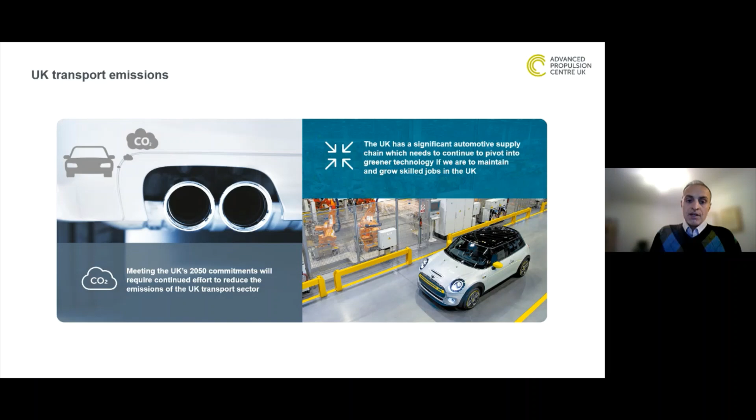In the UK, we specifically support later stage R&D and commercialization through our CR&D program, that's our Collaborative Research Development Program, and the Automotive Transformation Fund, which is the key engine to develop upstream supply chain for the future of the automotive sector, specifically for batteries, power electronics, materials.

We also have some bespoke funding programs like for SMEs and for other development processes like demonstrators.

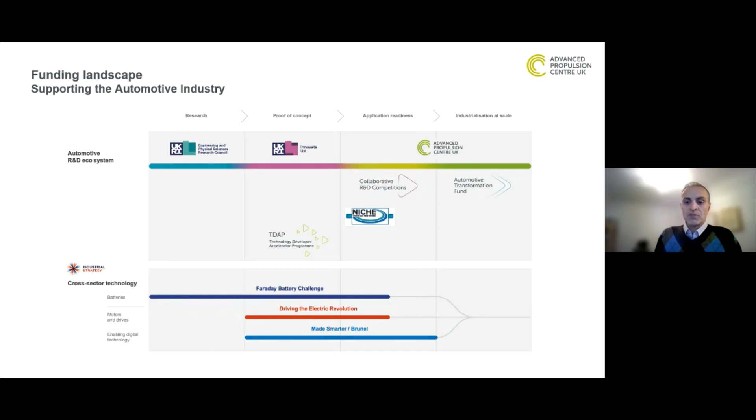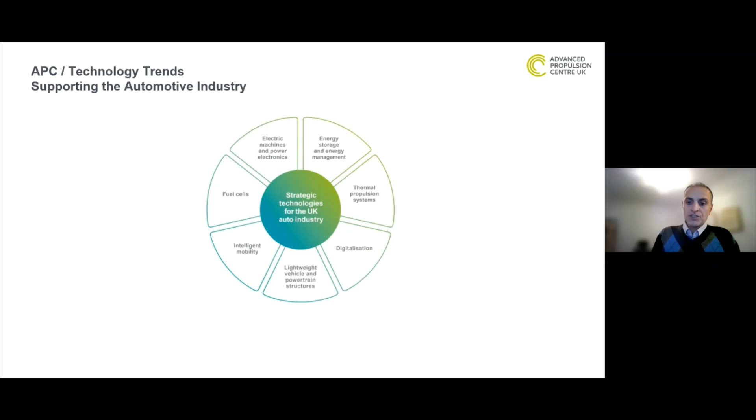We also provide strategic inputs and strategic insights, now a quarterly demand report. You've probably seen some of them over the past 3-4 quarters.

This is to inform the decision-making process and investment plan across these strategic technologies. We also undertake and provide bespoke analysis on key technologies and mobility trends, and all of these feed into our major funding programs, CR&D and ATF I mentioned earlier, also supporting national and international events and conferences like this one today.

Now let's take a look at the HDV sector, and my argument here is mainly applicable to HGVs, heavy good vehicles. I have not included off-highway heavy duty vehicles into this presentation.

We are working on that segment too, working on the TCO model and likely powertrain solutions across the whole HDV sector. Planning to publish an insight paper on HDV decarbonisation, hopefully Q1 next year, to include both off-road and on-road heavy-duty vehicles. But for now, the main assumption here is on-road HGVs.

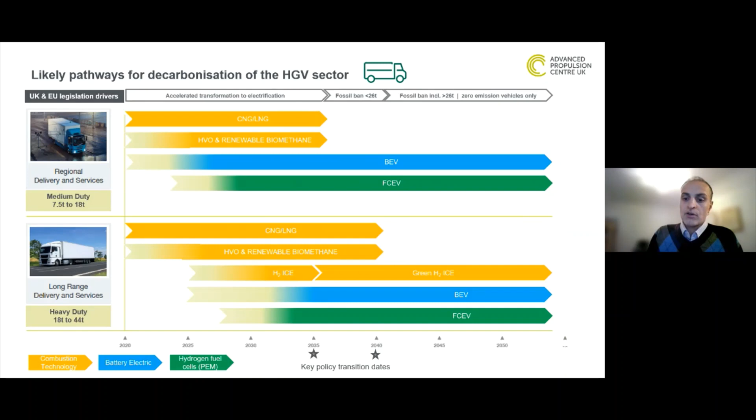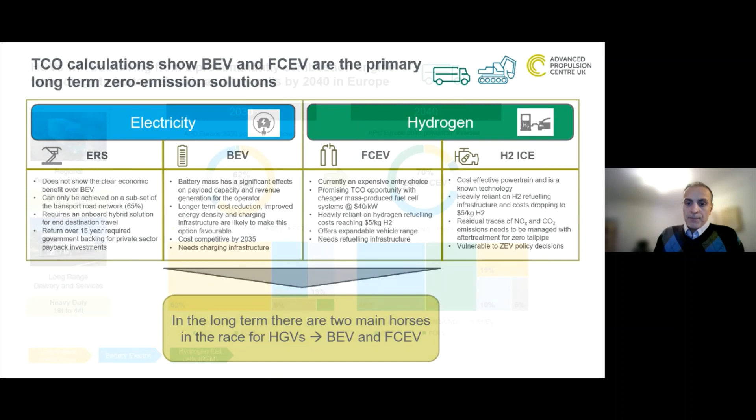So I believe 2 main horses in the race to zero emission HDV sector will be electrification and fuel cell. This means moving from today's profile of more than 90% of the fleet being internal combustion based on fossil fuels, to around 62% diesel in 2030, and then a major shift we will see from 2030 to 2040, getting to more than 70% of HDVs being on BEV and fuel cell technologies.

And in that mix, you can see battery electric will be dominant at around 40%.

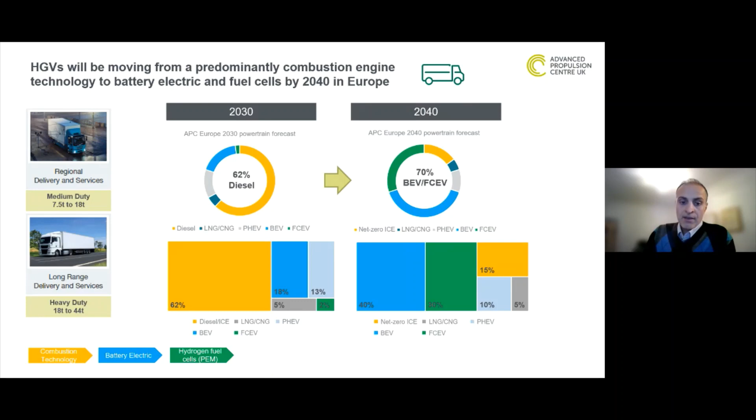So having that in mind, now let's take a look at one of our recent publications, our latest quarterly demand report. It's the latest one until next week, or maybe the first week of January, when we publish our next quarterly demand report for Q3.

This one is published in September, and you can download it for free from our website. I have to add that in previous quarterly demand reports, this one and the next one we're going to publish, either next week or the first week of January, we did not do a specific analysis for the HDV sector demand yet.

We are currently doing a supply chain mapping and intend to publish an insights report based on that, and then provide detailed analysis of the battery demand, including alternative chemistry and some of the discussions you've had today from the previous 2 sessions. So just have that at the back of your mind while I'm talking over the next few slides.

So this is an overview of what our quarterly demand report covers from global, European and UK perspective. Our forecasts are based on vehicle production geography rather than sales. And we look at LDVs, light duty vehicles, and HGV vehicle segments in our quarterly demand report. So we analyze the materials requirements, also forecast electric motor demand and materials requirements for that too.

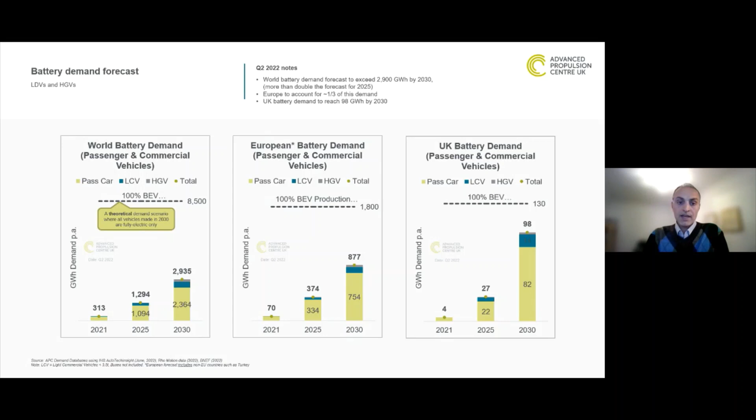So the next two slides, this one and the next one, are focused on the LDV segment. As I said, we didn't do a tailored HDV analysis last round, and even this round, we are not going to provide detailed data for the HDV segment. As I mentioned, we are working on an insight paper on supply chain opportunities, and we'll provide detailed data and figures for the HDVs. However, I think looking at the battery demand from an LDV perspective will give us a good overview for the supply chain opportunities across the entire supply chain.

And I'm going to mention some of the cross-cutting themes and challenges and opportunities for the whole sector for all vehicle segments. So bear with me until I get to those summary points. So battery demand for the LDV segment, passenger cars and vans under 3.5 tons, accounts for more than 85% of the total automotive sector demand. And as we expected, BEV production takes the lion's share of demand out to 2030. Globally, we expect BEV production to account for around 40% of all cars and van production by 2030. And in Europe and the UK, we see this figure being above 60% in the same period.

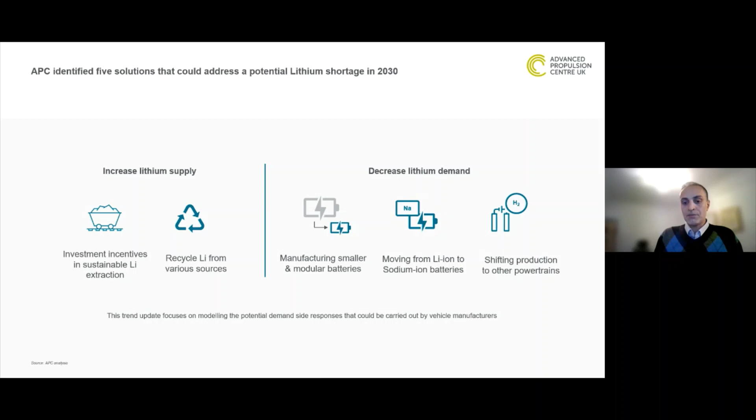While there has been a lot of talk about the investments required in extraction and refining of battery-grade lithium, in our latest report, we focused on understanding the potential demand side from OEMs, and it's LDV OEMs I'm talking about here. So those scenarios on the right-hand side, decreasing lithium demand, is mostly applicable to LDVs. But I think on the next slide, I'm going to show you some of the impact that the HDV OEMs' requirements and strategies could make to address them as well.

So just going back to those pathways to reduce exposure to lithium shortage, based on our analysis, the impact of investment in lithium extraction, sustainable lithium extraction, and basically investing in the upstream supply chain for lithium could be relatively high by 2030 compared to recycling lithium from BEVs, for example.

We think significant supply from BEV end-of-life retirement and battery recycling will likely come after 2030, maybe around 2040. But investment and innovation in recycling should happen by the end of this decade, and we have to think about it upfront to enable recycling towards the middle of the next decade, towards 2040.

In terms of decreasing lithium demand, moving to a smaller battery pack could have a relatively high impact, mainly applicable to the LDV segment, and it would call for more investment in charging infrastructure, which could be a helpful step forward for the electrification of HDVs too.

Looking at alternative chemistry, we said it could have a lower impact, again mainly because it's still at R&D stage. Moving towards higher TRL and MRL levels would probably take slightly longer, happening after 2030 to have a bigger impact. The other scenario for both LDVs and HDVs is combining and using alternative net zero powertrain technologies, like using fuel cell technologies alongside battery electric technologies.

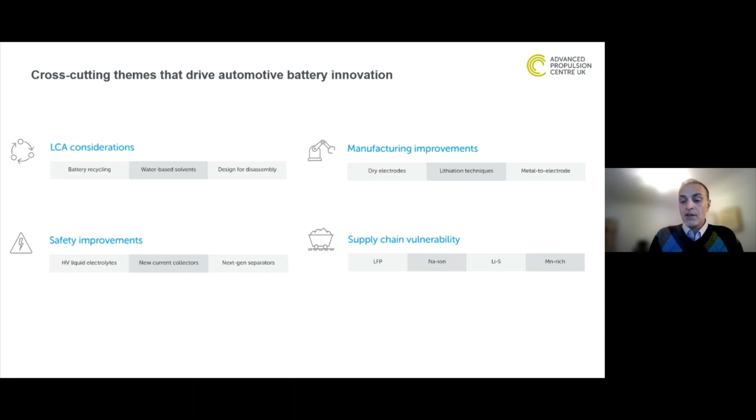So, in summary, I think the global battery demand growth for this decade will reach over 2,900 gigawatt hours by 2030 for the automotive sector. This will, of course, put pressure on global lithium supply, which needs to grow exponentially by 8 times compared to the current level.

And we need to invest more in battery innovation for different applications. Invest in alternative net zero powertrain technologies, alongside BEVs, to reduce reliance on one material, to reduce reliance on lithium markets.

Also, EV batteries will be subject to cross-cutting challenges, which calls for R&D and innovation across these four themes: safety, manufacturing improvements, recyclability and implementation of a circular economy business model, and of course supply chain development, especially on the upstream side of the battery manufacturing and battery supply chain. That's where we need to establish links with likes of CBMM to ensure security of supply for the future of UK battery demand.

So UK opportunities in this sector: developing upstream supply chain, attracting anode and cathode manufacturers to build an ecosystem for battery production here in the UK.

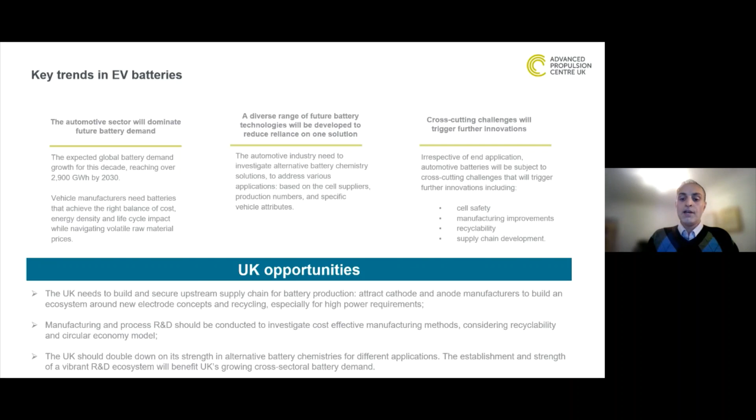I think we had the news a few weeks ago - we have confirmation of the second round of funding for the Faraday Battery Challenge, which will leverage R&D to address some of these battery innovation requirements. But obviously, we need continuous investment, private and public, to secure the future of the UK automotive sector.

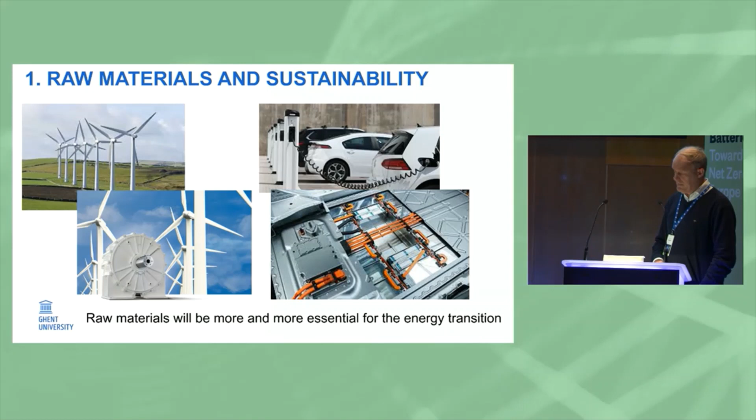The need is huge. If you look at international reports, for instance from the OECD in their outlook to 2060, they expect a quadrupling of demand for metals. And if you look at European Commission studies towards 2050 for nickel and cobalt, they expect a 3-fold or even a 10-fold growth in demand. That's huge, so circular economy and recycling will not be able to supply the demand. We will need further virgin resources, I may say.

These materials are essential to address climate change, so they should mitigate climate effects. But of course, these huge amounts of materials - we may wonder if this will also come with a certain footprint, or a new footprint, or another footprint. So are we really facing a sustainable transition if we have these huge amounts in front of us that we have to mine, refine, process, manufacture, and so forth? So we need a kind of sustainability assessment, I would say.

This is very important because there are already potential threats in scope. We know that mining, like agriculture, is a land-based activity that brings threats for biodiversity, for the ecosystem. And we know that we also need ecosystems, because ecosystems provide us with ecosystem services - provisioning of food, regulating services, even cultural services. So pretty important.

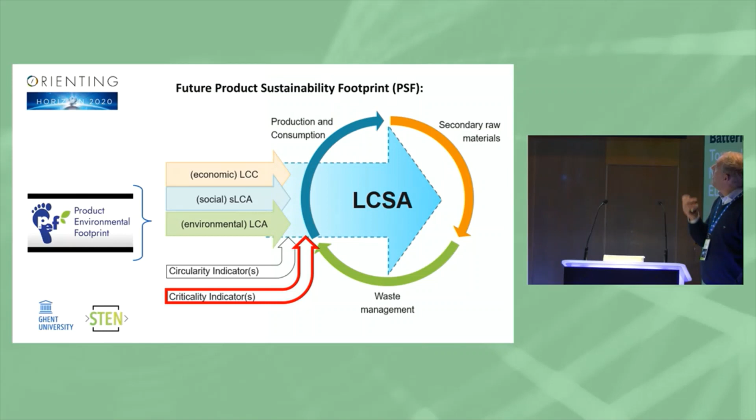Just for information, in the European Union we are also working on expanding the product environmental footprint. The European Commission, in the long term, likes to move from product environmental footprint to product sustainability footprint - expanding from the environmental pillar to also incorporate social and economic issues, plus circularity and criticality, making up the full picture of product sustainability footprint. That's an ongoing project with multiple partners, including industry.

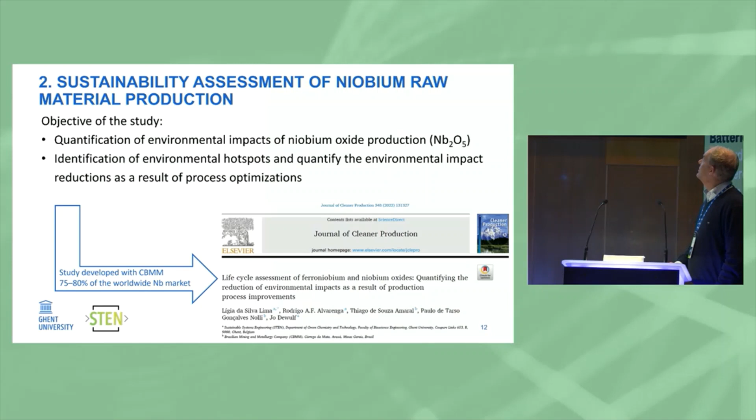That brings me to my second section, looking into niobium. We had a recent study together with CBMM, which is quite important if we want to address environmental sustainability of niobium raw materials. We looked into niobium oxide production to identify environmental hotspots and to see room for improvement, options to improve the production. This year the paper was published with Lígia as the main author. I'll explain a little bit of the outcomes here - if you're interested in further details, you're welcome to look into the paper.

Essentially, what we did is a cradle-to-gate study. We looked at the niobium oxide leaving the plant in Araxá, Brazil, and related all impacts to 1 kilogram of niobium oxide. Here and there we needed to do some allocation - these are things you need in an LCA. We were lucky to have really representative primary data from the company. And of course, for the background supply of chemicals and so on, we needed to rely on market supply - databases like ecoinvent, which we used.

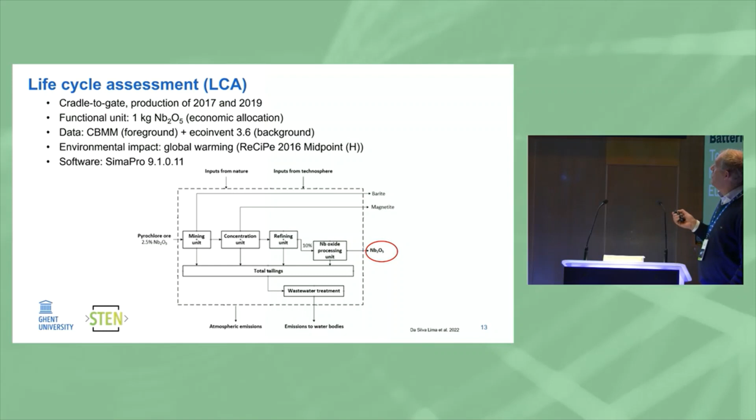We looked into different environmental impacts. In this presentation, I'll focus on global warming, and of course you need software to run that. Here you have a scheme with the main processes included in the system boundaries: mining, concentrating, refining, the oxide processing, and also attention to the further downstream processing of residuals - tailings, wastewater treatment, and so forth. You have inputs taken from nature, but also from the market, like chemicals for processing, and you end up with emissions alongside your main product and co-products.

Of course, your ore body - remarkably, the amounts needed in 2019 were higher than in 2017, so the ore grade was different. That's not really favorable in terms of decreasing the footprint over time. However, there were a couple of other factors that were favorable.

For instance, the use of renewable energy was increased from 2017 to 2019, and non-renewable based electricity was even phased out in between. Also, with respect to fuel consumption, we saw a lower ore grade used, and even there we saw a reduction in consumption because of process modifications.

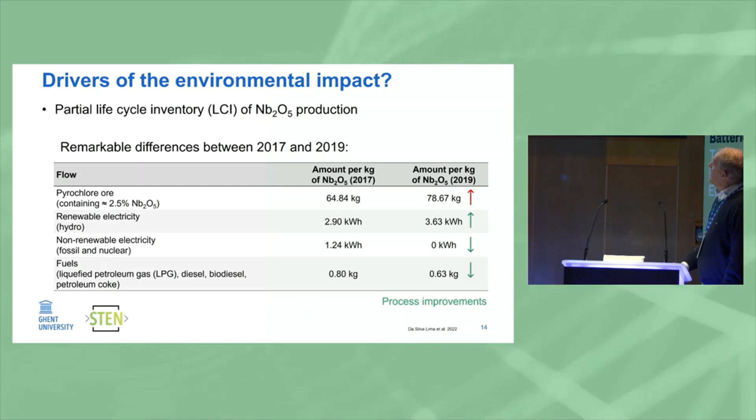If we utilize this information and other information and calculate the carbon footprint in kilogram CO2 equivalents per kilogram of niobium oxide, we see a reduction from over 6 down to 4.7 between 2017 and 2019.

If I concentrate on three main contributors here: first, the direct emissions, that's the red block. Despite having more ore in 2019 than 2017, we observed especially lower amounts of coke, petroleum coke, diesel, and LPG. On the other hand, we had more charcoal used in 2019, contributing to these direct emissions.

On top of that, the yellow block, in terms of chemicals, we have a mixed picture here. We have more potassium hydroxide used, but far less sodium hydroxide and sulfuric acid, so somehow still contributing to a decrease in the footprint 2019 versus 2017.

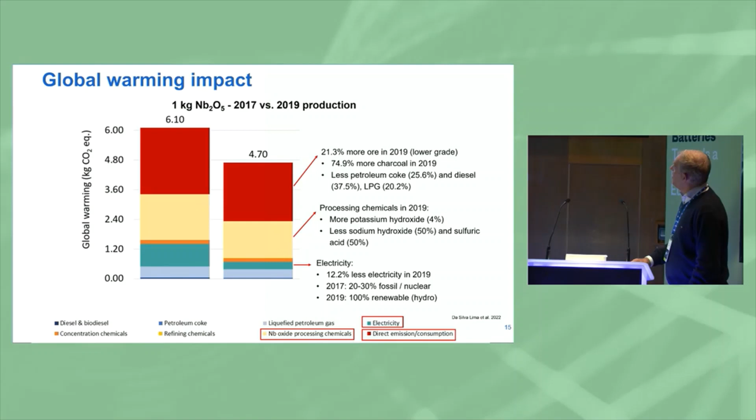And then the energy mix, the green block - that's the most different one, or the one with the highest difference between 2017 and 2019, especially because in 2019 we have this fully renewable-based electricity that contributes to the reduction of the carbon footprint. So overall, it's about a quarter reduction between 2017 and 2019.

You see that process improvements really matter. And that's a result of different contributors, I would say - the electricity mix has been changed, the fossil fuels have been changed, and the chemicals as well.

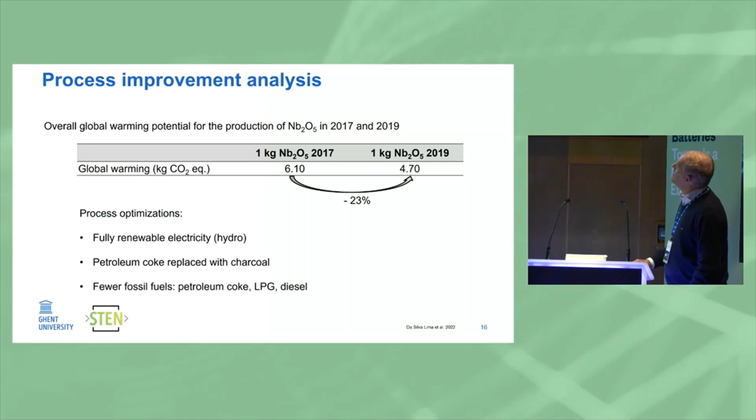Following the raw materials production, of course, you are not yet at your final product for your client. We have to look into the next stage, which is the manufacturing of materials. There we have an ongoing study with Echion - the study is available, but the publication is underway. I suppose Alicia is working on this this afternoon.

We looked at this niobium-based XNO, as we already have seen today in another presentation, and compared it with the LTO active material. If we look at the carbon footprint again, we see about 50% less carbon footprint associated with the XNO material on a mass basis, per kilogram.

And if you also factor in the performance - the cycle life, the kilowatt hours delivered over the cycle life - you see an even higher difference, in the sense that about 40% is the footprint of the XNO-based battery material compared to the LTO-based one. So in this sense, it looks like this battery material is pretty promising also in reducing the carbon footprint of the battery materials chain.

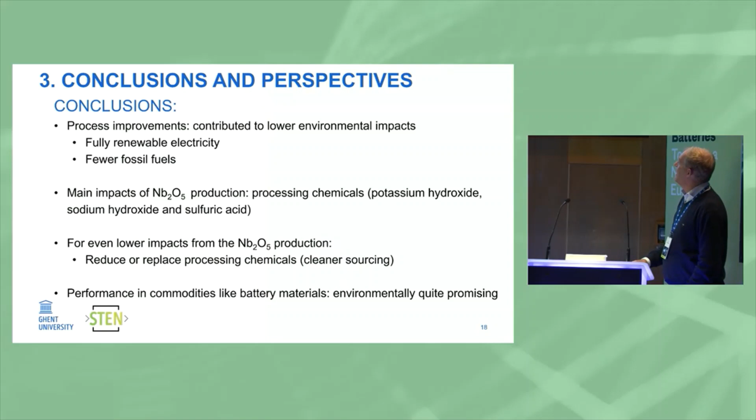In this sense, I would not say that CBMM or other companies should stop with the 2019 results. No, they should go on looking for process improvements, and not only their own process improvements, but also in their sourcing of chemicals and so forth. From the results we have so far together with the Echion company, it looks like niobium-based materials are quite promising from an environmental perspective, the carbon footprint perspective.

Some perspectives next to the conclusions. I think these raw materials, niobium and others, they come with a footprint anyhow. We need this mining, refining, there is a burden anyway, there will be impacts on biodiversity and so on. So my point is that we should try to minimize that, of course, with optimization of the supply chain, but also the end of life.

Once we have these precious materials, I would say, we should keep the value in the economy. It would be a shame to use them once in a battery and then lose them. So we have to keep the value, and that's something I worked on during my stay at ETH Zurich, because people in the LCA community think that we have to address resource depletion, that metals disappear, but they do not disappear, of course, you know that.

But what is the issue then with metals and metal supply? Well, actually, to my understanding, we need to keep them accessible for the next use, for the next life cycle, for the society on the long run. And I think that's the challenge as a base to develop circular economy, because that's the way we should try to keep the value in society, that the investment we have done economically speaking, but also environmentally speaking, that we have return on.

So end of life management is very important, and not only at the end of life, I think at the design stage it's pretty much important too. And then people immediately think of recycling. I would say yes, but also no. If you go into literature for circular economy, you will find more than 30 R words, from repurposing to reuse and whatever. Of course, they do not all fit to battery materials, I do understand, but it might be more than just recycling as well there.

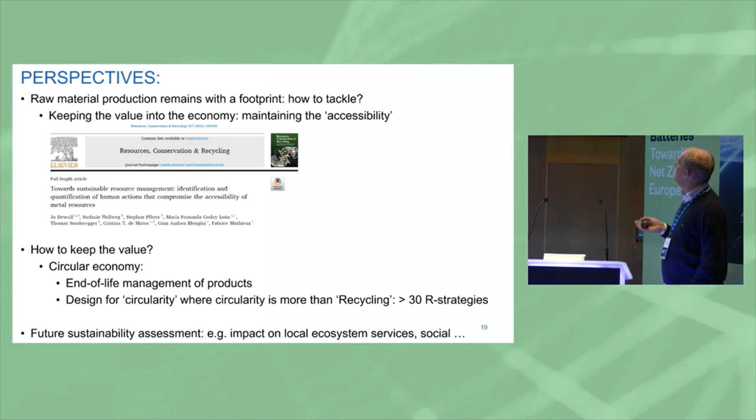And for the future sustainability assessment, of course, we should look into the carbon footprint, global warming, but it's much more than that. First of all, environmentally speaking, ecosystem services impact is important. It's not properly incorporated in LCA, to my understanding, today. So we really have to bridge with the community working on ecosystem services impact assessment. And as I told you, it's not only planet, it's also people, the social impact assessment is important as well.

So that was my presentation. Thank you for listening.

Thanks very much, Jo. That was a really useful overview. It's a good context about the importance of taking sustainability criteria into account when we're looking at supply chain resilience, with a really nice case study there, focused on the material of the day, niobium. So I'll be interested to look more closely at those papers you published on that topic.

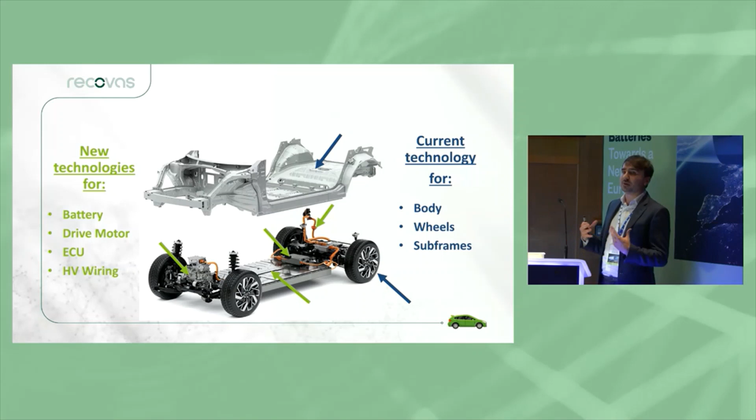And the high voltage wiring, there's a significant copper content in these vehicles. Copper's trading around £10,000 a tonne type of price. It's a worthwhile resource, we need to keep it in the UK. We need to recover that as effectively as possible.

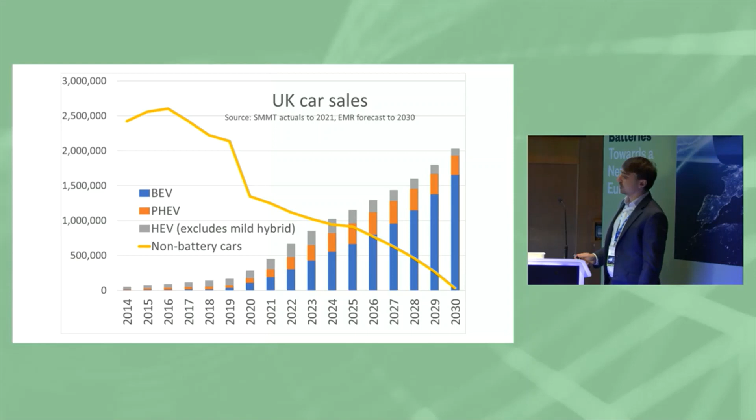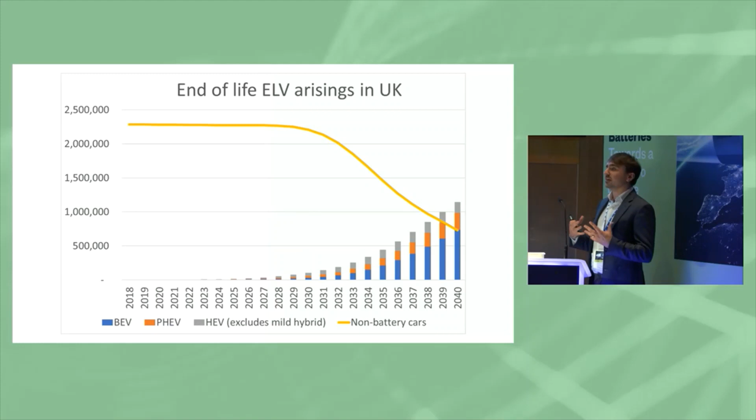However, this is the interesting one. When you look at the end of life, you've got about a 15-year delay and lag between them. So when we're looking at current volumes, we're talking almost negligible volumes in comparison. We're not doing this because it makes commercial sense at the minute. It's not until we get to about 2039, 2040 that we as a business will start to see a 50-50 split. Up until then, it really is about developing this infrastructure and building it in a scalable way moving forwards.

There's a lag between the number sold and the number reaching end of life, and this is where circularity falls into challenges. We also know that with the evolution of battery chemistry, vehicles placed on the market today will have different chemistry to those placed on the market in 15 years time. So even though we can recover those materials, they're not going to be the exact same materials you want to feed into your vehicles of the future. It's about how we can bridge that gap, as was mentioned previously. More raw materials will need to be brought in, but we need to make sure we recover the materials we do have because of their strategic importance and value.

Another massive variety of things to discuss. From our side, we're looking first at training of operatives. Traditionally, the end-of-life vehicle market and vehicle breakers is not a high-tech industry. It's not highly skilled workers most of the time, and these are really dangerous batteries they're dealing with, in dangerous environments.

There's a lot of training and skills needed in this space, along with standard operating procedures for how you deal with these vehicles. As a market leader, it's part of our responsibility to write industry white papers and share this with the wider sector, because if we don't do it, others won't, unfortunately.

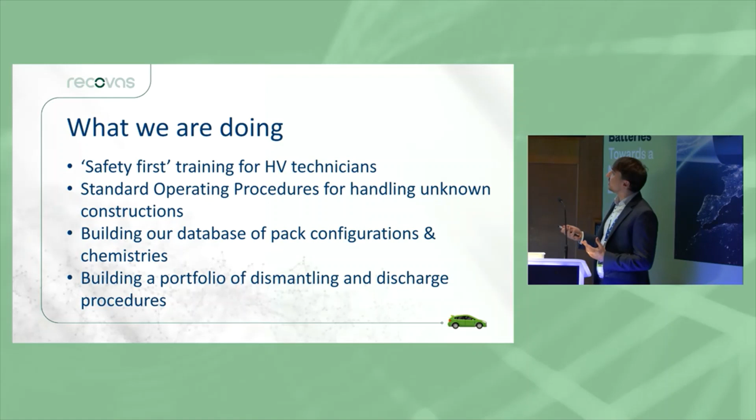The key one for us right now is building up a database of what chemistries are in all these battery packs, what configuration they're in, moving more to cell-to-pack level rather than modules. That obviously changes what you can do from a reuse or repair perspective, but understanding the chemistry is key. A huge part of that is about value—what your nickel, manganese, cobalt content is, etc. But also moving more towards future battery technologies like LFPs, LMOs, etc. Your values are changing significantly, and that hugely impacts the value of that vehicle at the end of its life.

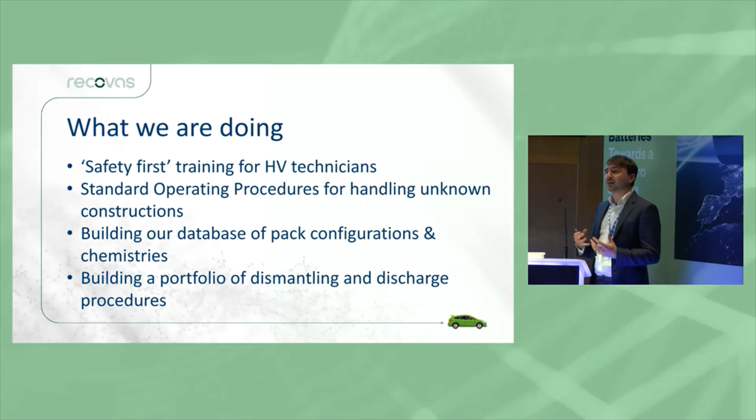It sounds obvious, but dismantling these batteries and then shredding them at end of life generates some chemicals you wouldn't necessarily expect. You've got fairly obvious ones, like fire risks, which is why you tend to shred these modules either wet or in a nitrogen inert atmosphere. There's also flammability from the electrolyte—as highlighted previously, there are massively varying chemistries in the electrolyte, so you can't just assume a single flashpoint for these materials.

Another issue is graphite. As we all know, it's incredibly fine dust, so the explosion risks are huge. You have to have incredibly high levels of containment—pharmaceutical grade equipment is what we're mostly putting into our plants, running at negative pressure to try to achieve that. Then there's chemical safety: carcinogens, sensitizing metals, and HF gas, which has been a huge discovery that isn't very widely spoken about in the battery recycling sector. The generation of those gases has to be managed, scrubbed out, and cleaned during the process.

There are some fairly scary videos online showing what's being done in the Far East and Asia—plants covered in black dust, which is obviously half graphite but also half carcinogenic metals. In the UK we need to make sure we're the complete opposite of that, doing it right from the start so that when our volume builds in 10, 15, 20 years time, we're doing it the right way.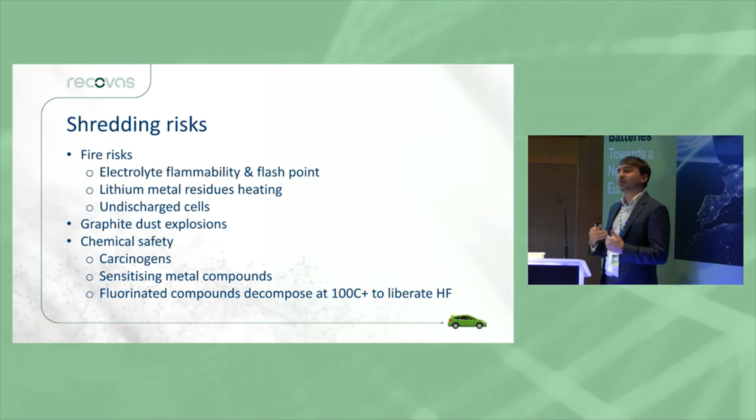The key one is looking at the processing of it—as discussed, we need to go massively high grade from a processing equipment side of things. The other aspect is personal exposure monitoring, which is why we're working with HSE, looking at personal exposure limits via blood and urine testing for some of our operatives, making sure that feeds in so we have evidence that the procedures and processes we're putting in place are working as intended.

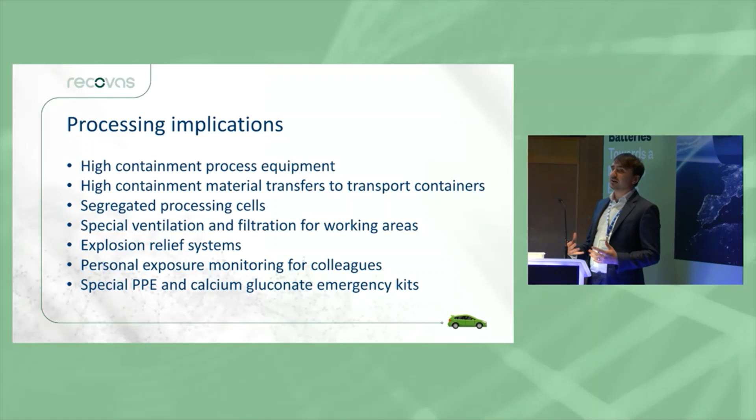Other ones I mentioned, things like LFP and new materials coming into batteries. The whole point of this conference in the first place is these chemistries are changing. There's a lot of aim to take out some of those expensive materials. From a recycling perspective, that massively changes the commercials of it. We expect we may get back to a point where we have to charge a gate fee to process these materials because there's so little residual value in the packs. So it's a really interesting market dynamic that we expect it to go positive, but it will then slip back as time goes on and chemistries change.

So that's one of the other ones, why we're looking at graphite and electrolyte. At the minute, they're mostly considered a waste product. Battery grade graphite is incredibly expensive to produce in the first place, and at end of life, we have a disposal cost of £100 a tonne. It makes almost zero sense for that to be the business case. So looking at ways that we can reprocess that graphite and recover that material is key.

Again, electrolytes - similarly, at the minute they tend to be burnt off as waste, but we need to be able to look at meeting those recovery needs, as well as for the EU directives coming in for recycled content targets.

So that's the next stage for EMR as a business - looking at how we can recover the graphite, whether we do it wet or dry processing. There's a lot of conversation about hydrometallurgical versus pyrometallurgical processing, particularly for the black mass. But how the primary processing and shredding is done has a huge impact on what downstream processes can be done to the material, and what the most optimized flow sheet looks like for that integration between the primary processing and the refining.